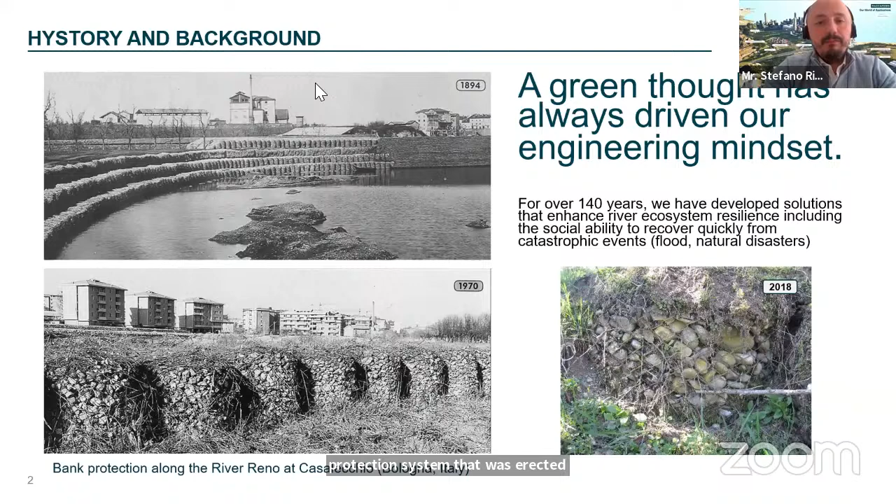What was done was to enhance the river ecosystem resilience in order for it to be able to recover from a potential catastrophic event, such as a flooding event. And the pictures that you see show that nowadays the protection system erected 140 years ago with gabions in the city of Bologna in Italy is still there.

Also, another evolution of the gabion itself was the mattress, the Reno mattress. You can use this for erosion protection of river banks, for example. Another evolution of this solution is the so-called Reno Mattress Plus for underwater installation, where basically you already have water in the river or port area, but you can actually pre-fill the mattress in a dry condition, lift it as you can see in the picture, and install it underwater. So this is another evolution of this idea from 140 years ago.

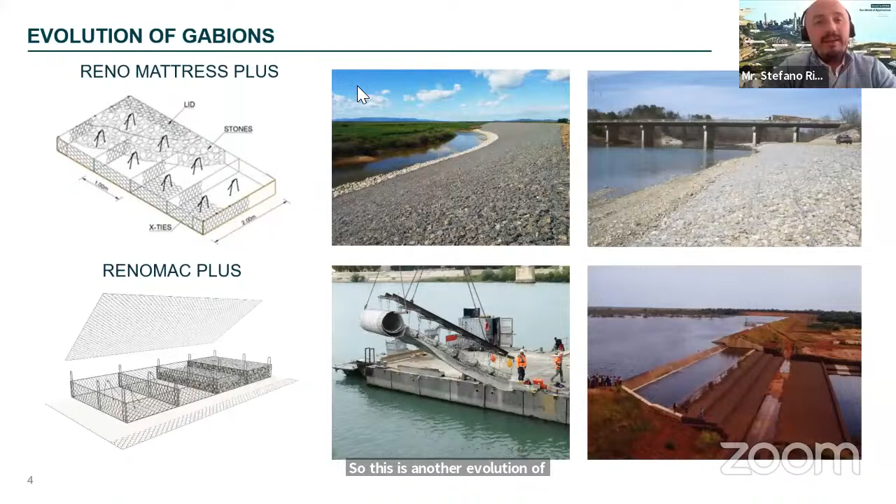But let's talk now about river work principles. Here we need to understand, and we need to ask ourselves as civil engineers, as hydraulic engineers, where am I in the design phase? Am I in a planning phase, a remediation phase, or do we have an emergency and need to find a quick solution to solve it? For sure, the best case scenario is to be in the planning phase, where you can actually plan the protection of the river or channel and have a sound engineering solution that will last for many years.

You can also be in a remediation case where you have, for example, a landslide or erosion at the toe of an embankment. So we need to go back and rebuild the bank where it was before the event, but cover it with a better and more sound engineering application and solution.

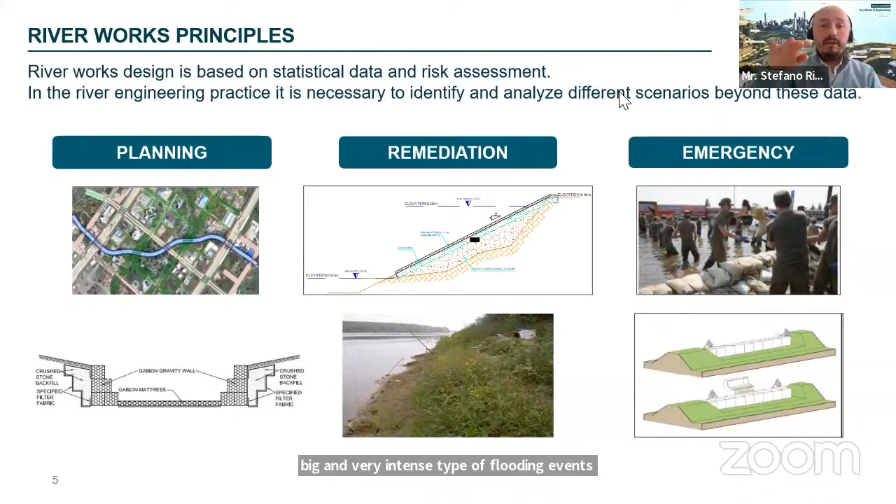You can also be in an emergency situation where you need to erect the bank of the river, for example if you are expecting big and very intense flooding events, so you can use some emergency application.

But very important for the river work principle is to have an idea of the characteristics of the watercourse, because we can divide the river into three main areas. It starts from the mountain region where you normally have very steep gradients, so not a big amount of water, but very powerful water because of steep gradients, high velocity, and high shear stresses applied on the bank. So you can have severe erosion and coarse bed load.

If we are talking about the mid-slope region, you are actually in the middle between mountain and valley, where you have moderate gradients, but a higher amount of water because you are collecting more water from the mountain region, and you can have some meandering in this type of area.

At the end, the third area is the valley region, where you have very low gradients but a big amount of water, so you need to confine and divert it, and you need to insert bank protection.

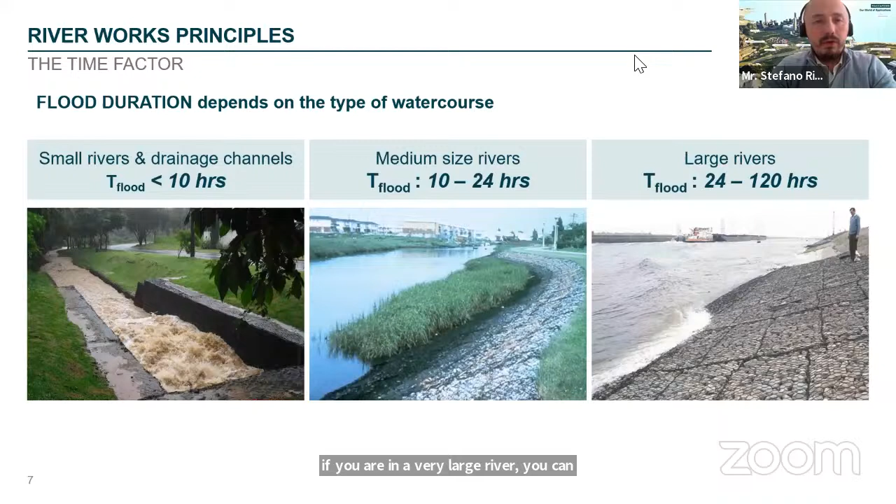If you are in a medium-sized river, it's between 10 and 24 hours. If you are in a very large river, you can go up to 120 hours — a very long duration. Depending on that, the time factor is very important in order to understand what resistance your solution needs to have in order to be safe from an engineering point of view.

But not only the time factor — also where we are and what function and application we need. For example, here you see different types of pictures: longitudinal protection of the river, a transversal gabion weir, a bank protection, and also a groin, depending on where we are along the riverbank.

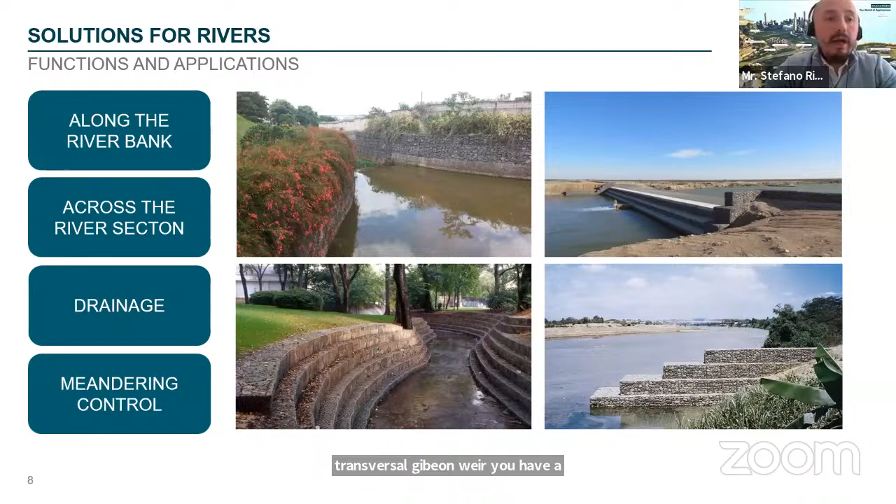So if we are along the riverbank, we need to understand which type of armoring system to use — a soft armoring system or a hard armoring system — but also we may need to go vertical with an earth retaining structure, depending on the failure that occurred and what the original bank profile was that we need to go back to.

What is very important, in my opinion, is also always to share experience, knowledge, and lessons learned in other parts of the world too. Imagine that this was a flood restoration project in France.

Back in October 2020, there was a big storm called Alex that caused significant damage in different parts of the country. The equivalent of a year's precipitation, one year of precipitation, fell in 24 hours. So nowadays we are facing this type of event with more and more frequency, where the same amount of water that normally falls over an entire year now comes down in just one day.

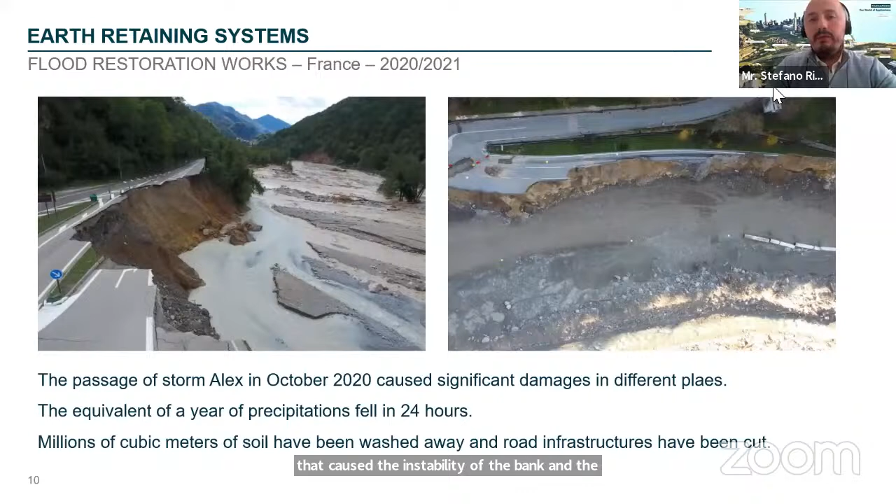This is a critical situation, and these are the results that our environment cannot take, because the design that was done, for example, for this river protection, was not considering that amount of water in such a short time. So what we had was a very big, huge erosion issue that caused the instability of the bank and the instability, as you can see, of the entire road in this case.

So what was done was a bank consolidation reinforced with, for example, reinforced soil structures up to 12 meters high, as you can see in the images, in order to have a hard retaining system using the Terramesh system or the green Terramesh, promoting vegetation growth, because at the end of the day, what gives you long-term protection is the presence of vegetation. This is why we always promote the use of green solutions, to decrease the carbon footprint of the overall structure but also increase carbon sequestration in the environment.

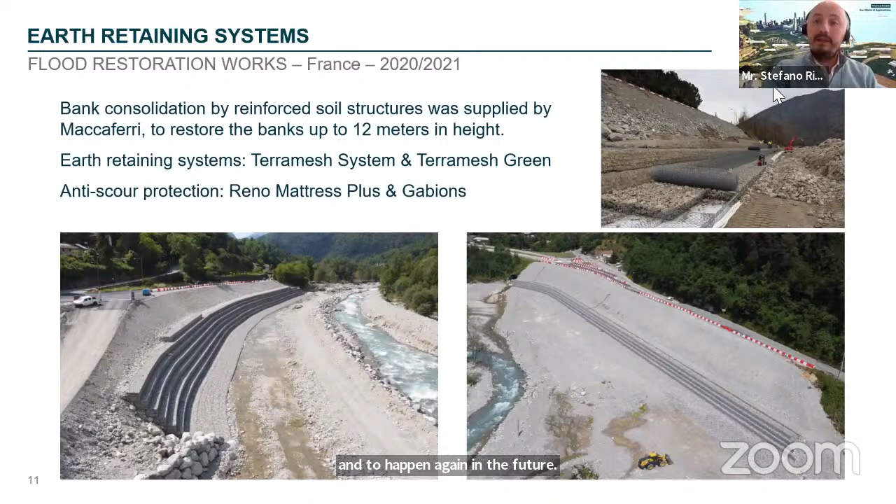We also added anti-scour protection at the bottom of the structure, because we want to prevent such an event from happening again in the future. So we added the Reno Mattress Plus and the Gabion structure.

Today, for sure, we don't have enough time to talk about all the principles, but if you are interested, we are always available to give you additional information on this lesson learned.

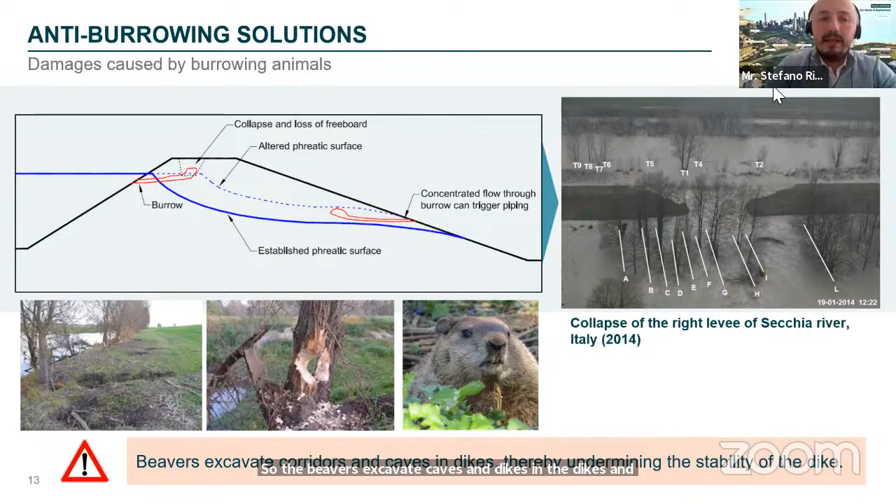Also, another possible solution to a big problem we are facing everywhere in the world: many structures and embankments are collapsing due to the presence of burrowing animals. Beavers excavate caves in dikes, undermining the stability of the dike. So basically what we need to do is prevent the burrowing animal from excavating a deep channel or a deep excavation inside the embankment, which causes a big problem of instability.

So we have different options to prevent this type of burrowing animal from excavating. We have a two-in-one solution, the anti-burrowing solution, but we also want to control erosion, so we promote vegetation establishment using the Renomesh Bio with a coconut fiber blanket attached to the double twist wire mesh, or the Renomesh Green.

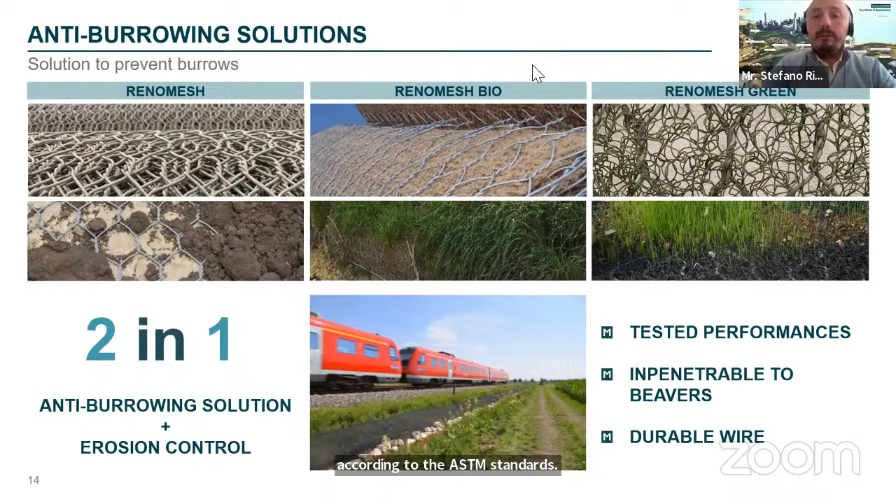Basically it's a three-dimensional turf reinforcement control mat, a high tensile turf reinforcement mat, or HTRM, as you're familiar with, tested according to ASTM standards, impenetrable to beavers, with a long durability of the wire up to 120 years.

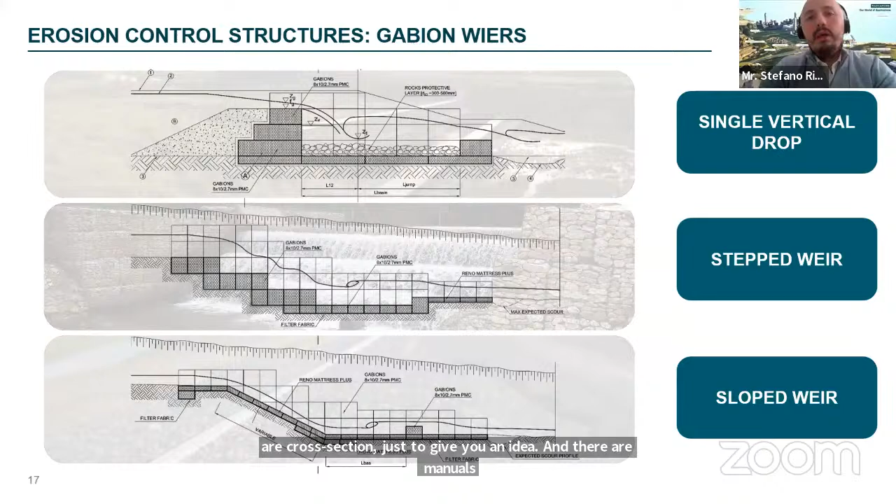Those are cross-sections, just to give you an idea, and there are manuals on how to design this type of solution. We always promote integration with nature.

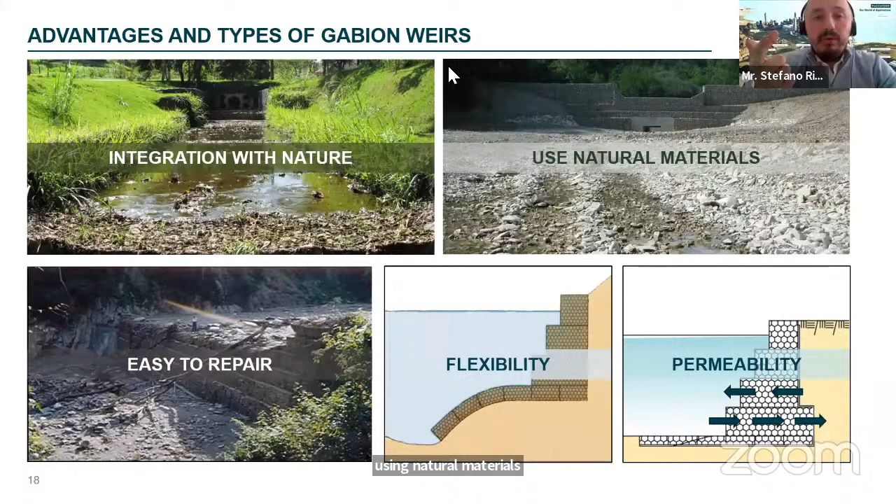This is very important because for us at Maccaferri, the green thought, as I told you at the beginning, is what drives us in our engineering mindset, because we want to integrate our solutions with nature using natural materials, but the solution has to be easy to repair, flexible, and permeable because of the presence of water.

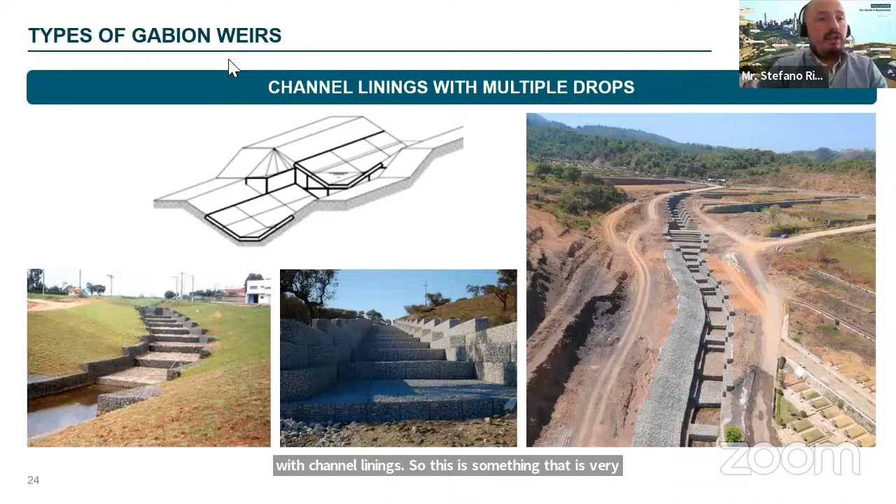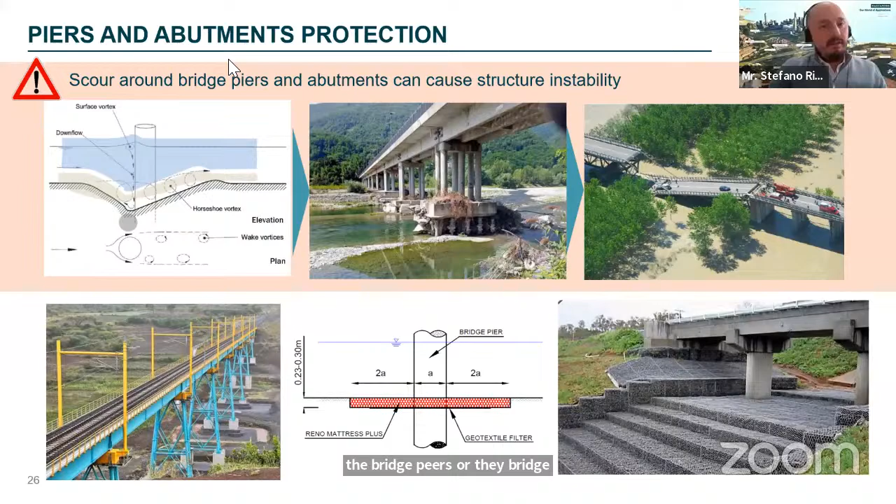Also, if we are across the river, the bridge abutments—this is very important and key to understand—many times we need to prevent the scouring effect that can cause structural instability of the entire bridge in the bridge piers. As you can see, many times the design was done without considering the potential long-term erosion effect. So what we need to do is protect the bridge piers or bridge abutments using a hard armoring system. The best way to show this is with a case history of hydraulic protection.

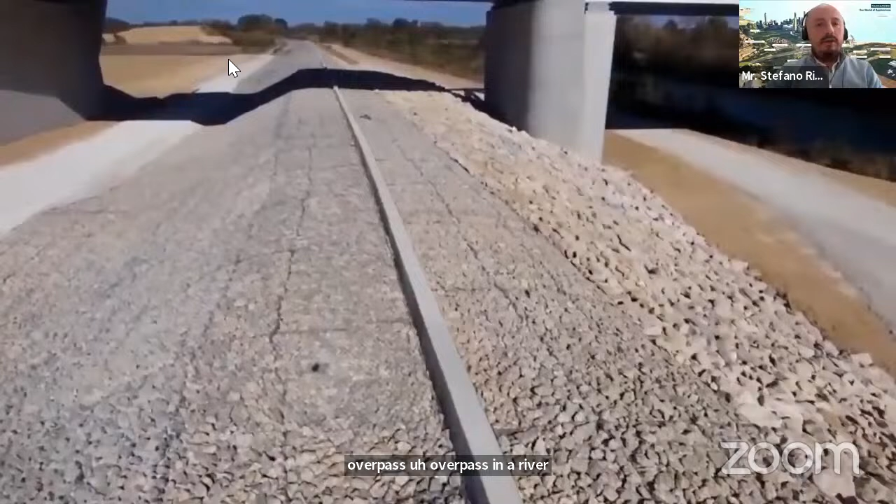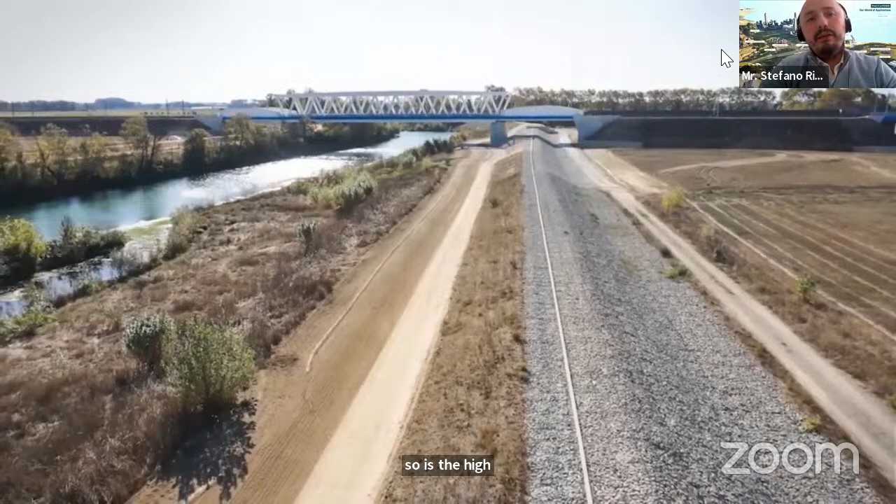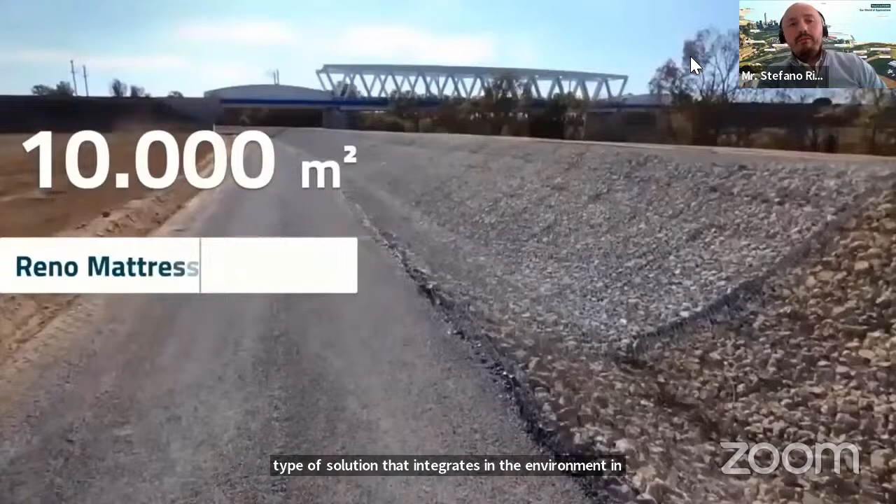Here we're talking about a railway overpass on a river—this is the TGV, the high-speed rail in France. As you can see, integrated with nature, the solution used was dyke protection using Reno Mattress and double twist wire mesh gabions. This type of solution integrates with the environment in order to protect not only the infrastructure, but also the entire community, preventing possible flooding.

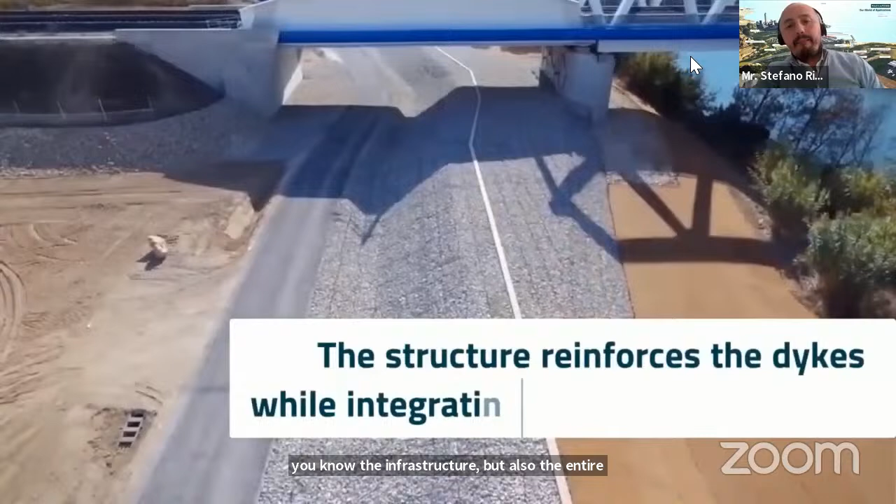As I was saying, this is again a real case scenario.

Let's move forward with drainage solutions for when we are getting closer to city centers or areas with highly impermeable surfaces. When we develop very impermeable surfaces, we get a bigger amount of water with higher velocity inside our drainage system. Our cities were designed many years ago, not considering the urbanization we are seeing nowadays. So the problem is that our infrastructure may not be designed considering the amount of water that now needs to be drained.

So maybe we need to go back and check, for example, for a small-size drainage channel, depending on the shear stress applied to the solution. Underwater, we can use Reno Mattress Plus, while on the embankment we can use MacMat, which is a high-performance turf reinforcement mat, the HPTRM, in order to have vegetation establishment, for example.

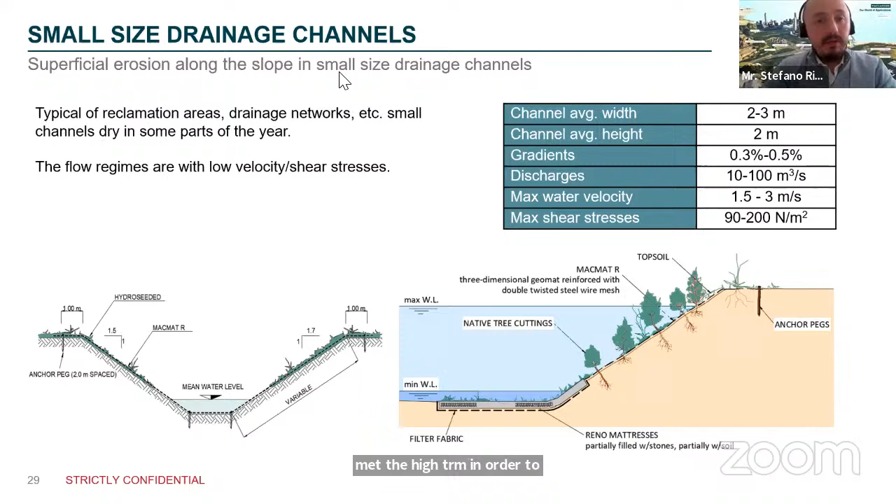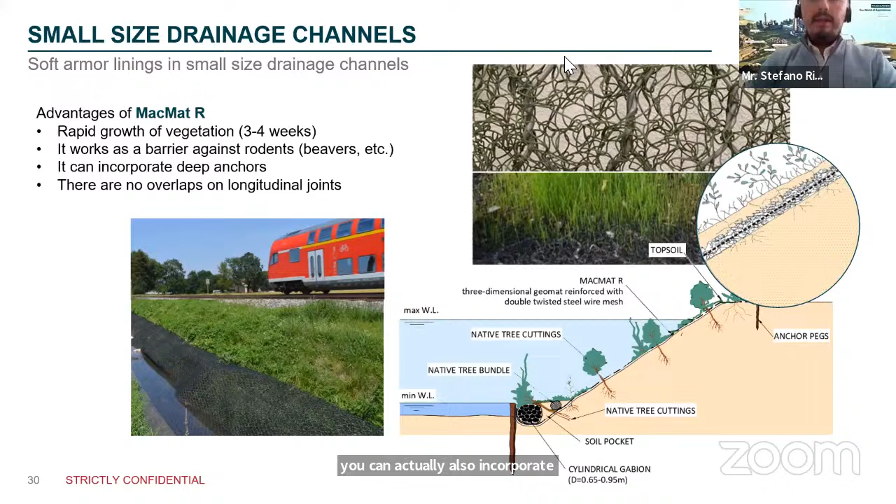What are the advantages of this solution? You have rapid vegetation growth—in 3 to 4 weeks you have vegetation establishment. It works as a barrier against rodents, as we saw before. You can also incorporate percussion-driven anchors, for example, and you don't have any overlaps between the joints.

Also, for a medium-sized drainage channel, you can use Reno Mattress Plus, and Dr. Ratnakar will show you later. Also, meandering control can be done using MacMat solutions where you need flexibility.

So what are the pillars of this type of hydraulic solution application? Flexibility and structural continuity. There is a big difference between rigid structures, such as concrete, or structures that cannot accommodate differential settlements, while with a flexible solution you can accommodate this kind of situation, considering that the presence of water is very common.

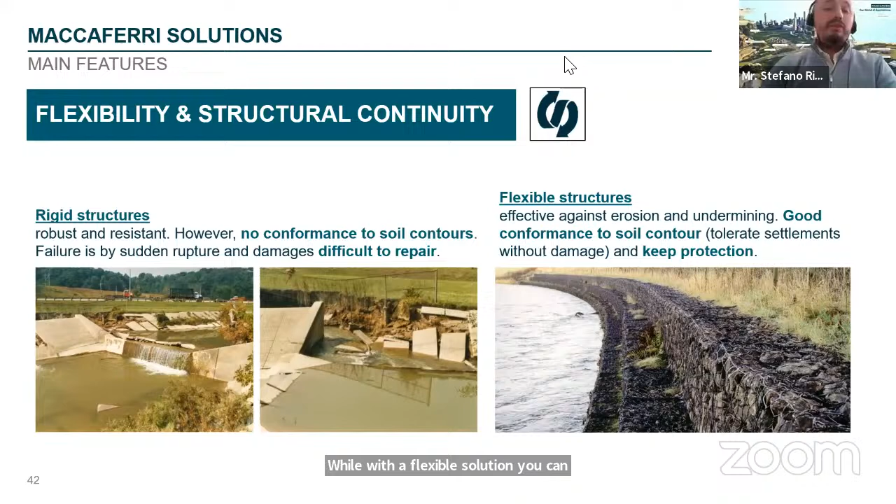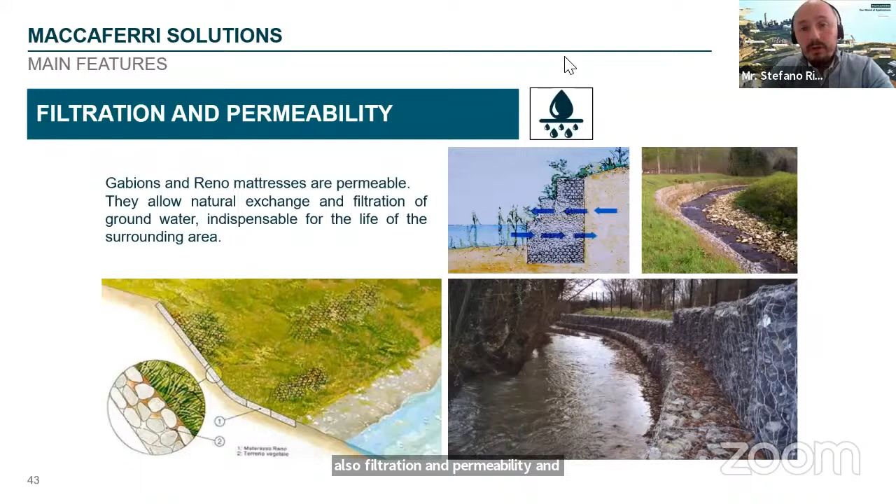Also, filtration and permeability, and vegetation establishment, which is very important from an erosion control point of view. But the most important, in my opinion, is environmental friendliness, because over the years the vegetation establishment creates a favorable environment during the recovery stage for this type of solution.

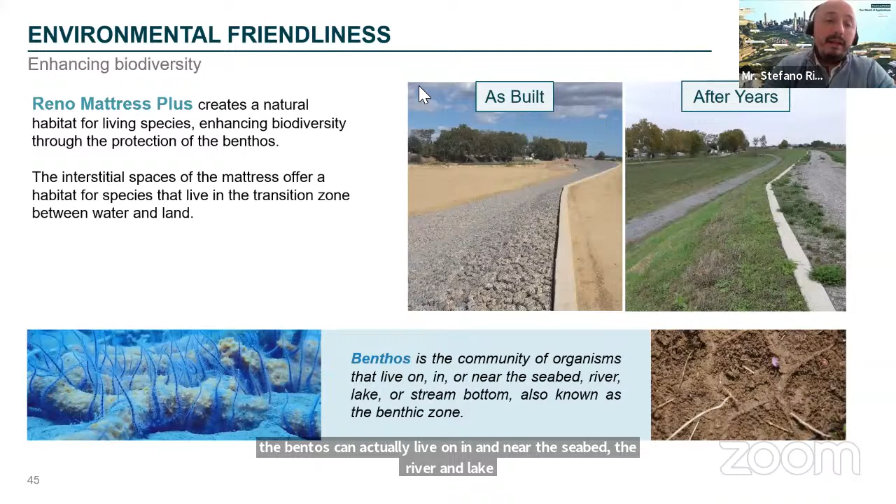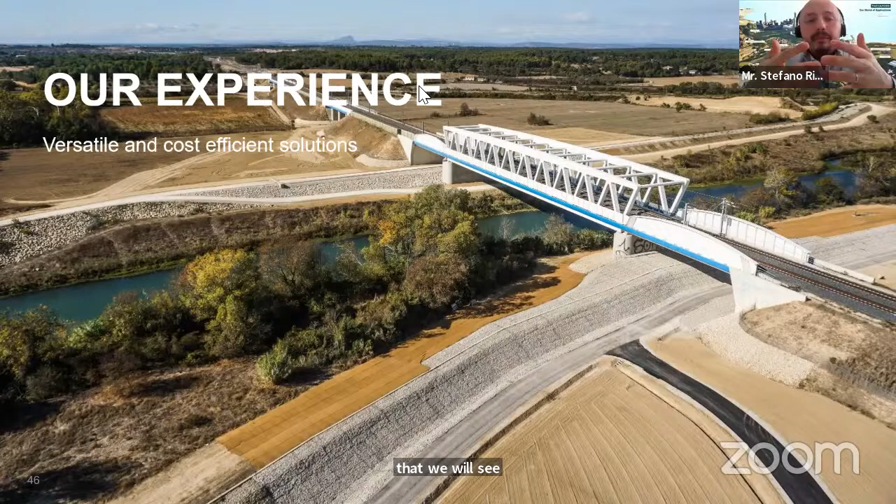Also, environmental friendliness—we are enhancing biodiversity because benthos can actually live on, in, and near the seabed, river, and lake. As you can see, we have plenty of examples, including one we will see later, showing the integration of our solution with the environment.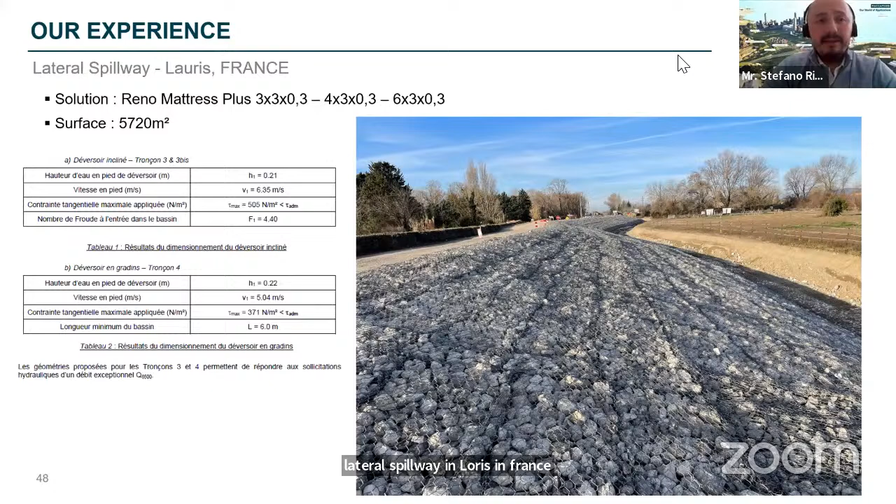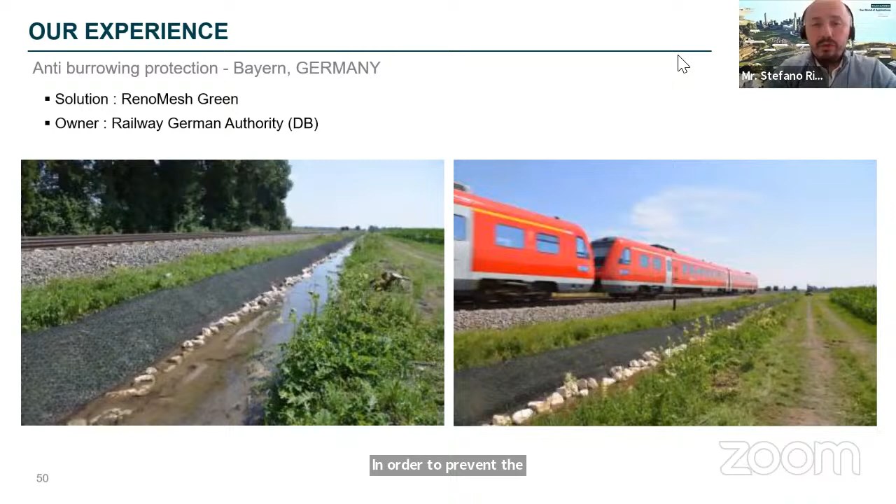Also another project in Romania to protect the culvert exit, which is very important. Also along a railway in Germany, to prevent beavers from excavating, as we saw from an erosion point of view, and also bridge pier protection—again, this is a very special application of underwater solutions.

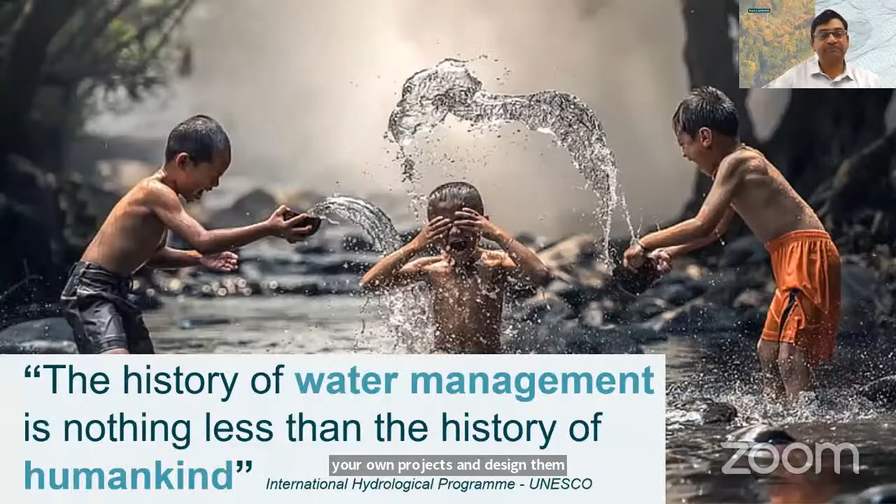To start with, if you see history, you will find all the major civilizations started with the presence of water, where there was a river course or major water source—all civilizations were around it, like the Indus Valley. The oldest civilizations you will find wherever there was water, because water is a very essential need for humankind, and that's why watercourse management becomes so important.

This is one of the biggest challenges in the 21st century. When I say watercourse management, it's not just about drinking water or irrigation water, but associated hazards also. Just now, Stefano presented a case from France where floods occurred because rainfall that's supposed to be received in a year was received in a very short span of time. I think this is very common all across the globe, and you must be seeing this in the news—India is not an exception.

We have flooding every year in the north part of the country. We have floods in the south—Kerala is well known now because of a few major disasters. Uttarakhand is not an exception; you have seen Uttarakhand for many years and how the situation is. So this is also one of the highest global risks which has an impact.

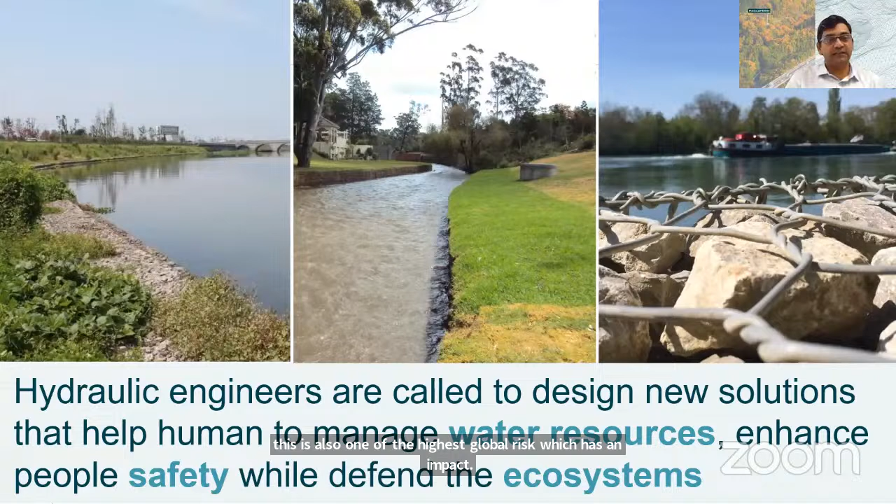Of course, when we look at ourselves as hydraulic engineers, we are being asked to design solutions that not only take care of the engineering problem, but also the safety of people and, most importantly now, the ecosystem. We need to look not just at today's problem to be solved, but take care that future generations shall not be negatively affected—if they have to be affected, it should be in a positive way.

In working in this direction, Maccaferri is committed to providing long-lasting solutions, and this comes through dedicated effort through innovation. The company started its journey, as Stefano mentioned, around 140 years back. From then, constant investment has been there. The important investment is in our innovation center in Italy, which we call the Maccaferri Innovation Center, which constantly works on innovative, sustainable, advanced products and solutions.

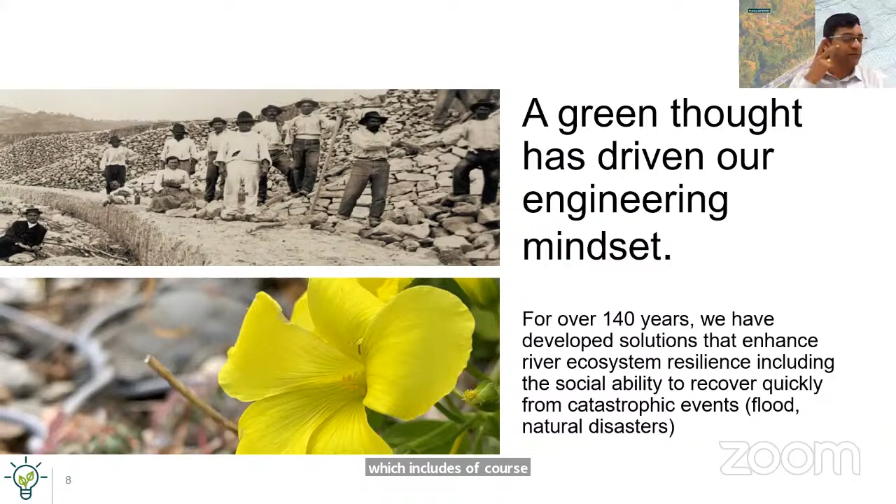Over 140 years, solutions have been developed for river ecosystems, which includes the ability to recover quickly from catastrophic events, usually floods or natural disasters. We had coined our campaign in the past called 'Design the Change.' Those who have been connected with us must be knowing about this campaign. For hydraulic engineering, we are looking at this campaign for providing long-lasting economical solutions.

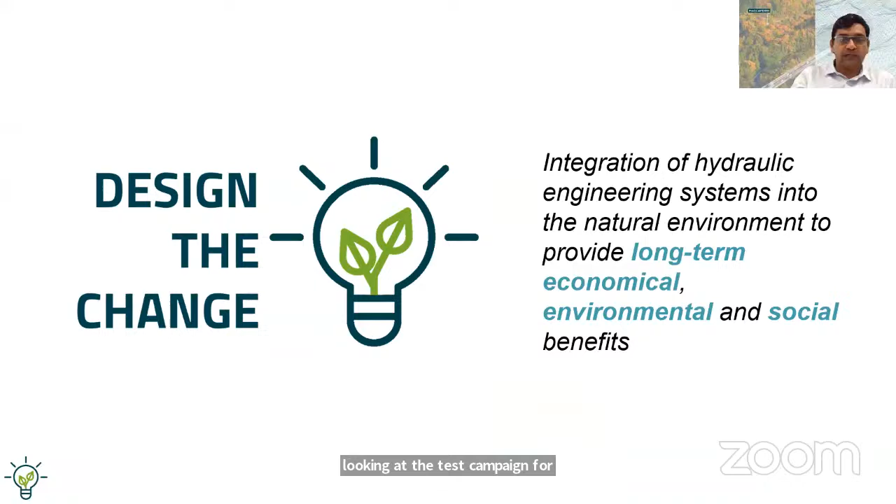Some historical landmarks on the development of the Reno mattress: the first ancestor of the modern Reno mattress developed by Maccaferri was the so-called Materasso Galleggiante, mentioned in historical books dated in the early 1910s, over 110 years ago. It was years later, in the early 60s, when Maccaferri developed the Reno mattress as an industrially manufactured product since its first applications.

Of course, mattresses are an interesting and flexible, monolithic structure. However, it was only in 1984 that mattresses became an engineered system, moving from a manufactured industrial product to an engineered system. Why do we say 'becoming'? Because it was experimentally tested at Colorado State University.

The standard mattresses at that time had a single diaphragm, which makes a partition, and it is connected to the base panel using spiral wire.

A few years later, in 1990, Maccaferri decided to industrially improve the manufacture of mattresses by pleating the base mesh panel to form a vertical partition, resulting in a double wall.

For two decades, the new mattress, so-called Castoro, was still designed using the allowable resistance factor from the standard single diaphragm tested in 1984. This was on the safer side, because the product with a double diaphragm has better resistance compared to the single diaphragm, but the single diaphragm performance data was still being used.

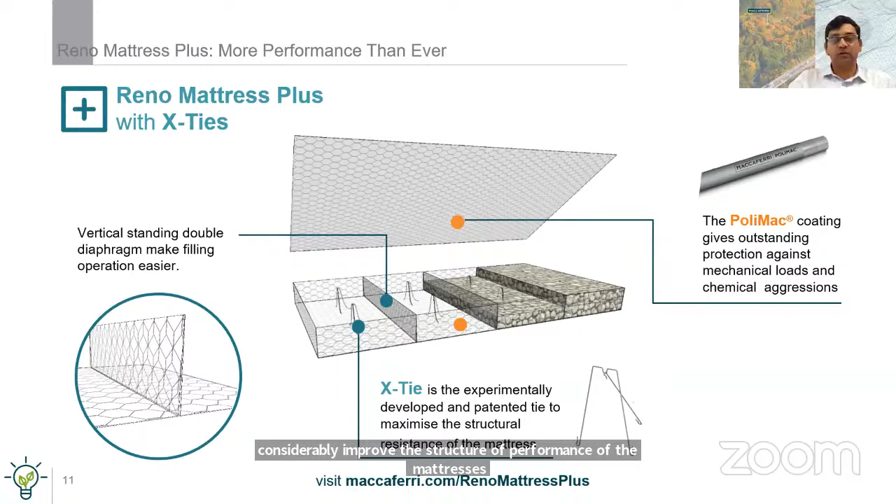The ultimate goal of this research was to introduce improvements in a new mattress system that could reduce the total cost of ownership in riverbank protection. The study was done in collaboration with MIC, the Maccaferri Innovation Center, and the Engineering Research Center at Colorado State University, one of the leading institutions for testing erosion control systems.

The objective of this study posed several challenges: the need to review the position of mattresses in hydraulic applications, the need to provide a common approach to stability in line with the state-of-the-art ASTM, the need to develop new ideas to improve performance, the need to provide numerical evidence of the different performance between double and single diaphragm partitions in a mattress, and ultimately, with reduced cost of ownership, the need to further raise the environmental value of the solution.

The research was developed in four steps. Step 1 aimed to analyze the effect of flow on the wire mesh and the type of partitions only. For this purpose, the test was performed running flow on empty mattresses. The scope was to see how much resistance the wire mesh alone would provide.

Steps 2 and 3 were made filling the mattresses with rock of different grading and uniformity. The combined presence of different partitions and stones allowed testing of the velocity dissipation through the mattress layer. Step 4 was made in a larger flume, simulating real flow regimes in an open channel.

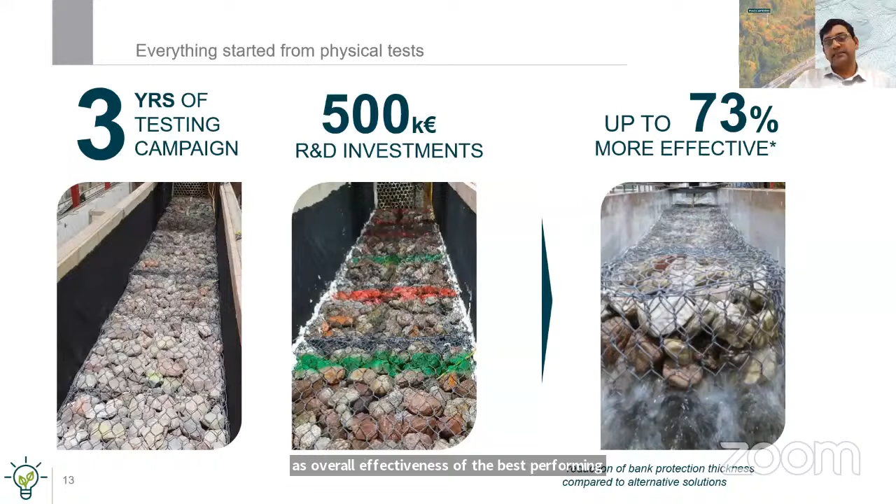The development of these phases required a thorough analysis of various aspects. All research was completed in almost 3 years, requiring important financial investment, as well as time and resources. On the other hand, the results brought to light a valuable outcome: the overall effectiveness of the best performing mattress resulted in a 73% reduction in the thickness of a bank protection compared to conventional riprap.

Of course, in summary, comparing the past and present design approach, we can say in 1984 with the first experiment study at CSU, followed by design criteria for stability of Reno mattress, with single diaphragm, in line with current design method used for riprap. When I say riprap, in India we refer to it as pitching or loose rock. The comparison based on the tractive force theory allowed us to define the equivalent design coefficient.

That's the Shields parameter, which is very important for designing these hydraulic structures to apply to mattress protection. This method, still in use today for riprap or pitching, is focused on the mechanical stability of the lining.

Condition of no movement of stone without consideration of potential erosive effects. The development throughout the years of new products, along with decades of successful projects and experiences with mattresses, and lastly creation of a new standard, ASTM D6460, introduced a new way to look at the stability of erosion protection systems - the mechanical stability combined with controlled erosion underneath the mattress.

This chart shows the summary of the past and present results, where we can observe the relevant improvements in mattress performance when we combine mechanical stability with an anti-erosion function. The light blue bars show the results for single diaphragm mattress based on the tractive force tested in 1984.

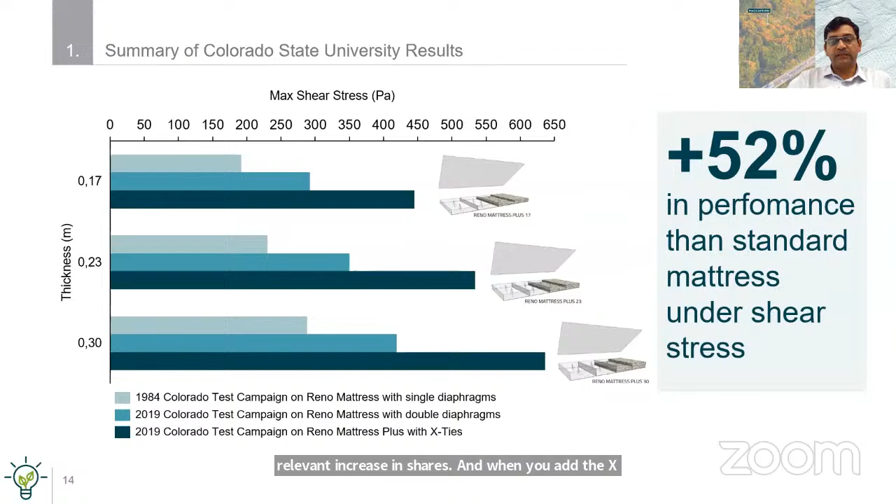Of course, all this information on Reno Mattress Plus, the CSU tests of the old ones and the new ones, we have updated in our software, that is MacRA software, which is available on our e-design platform.

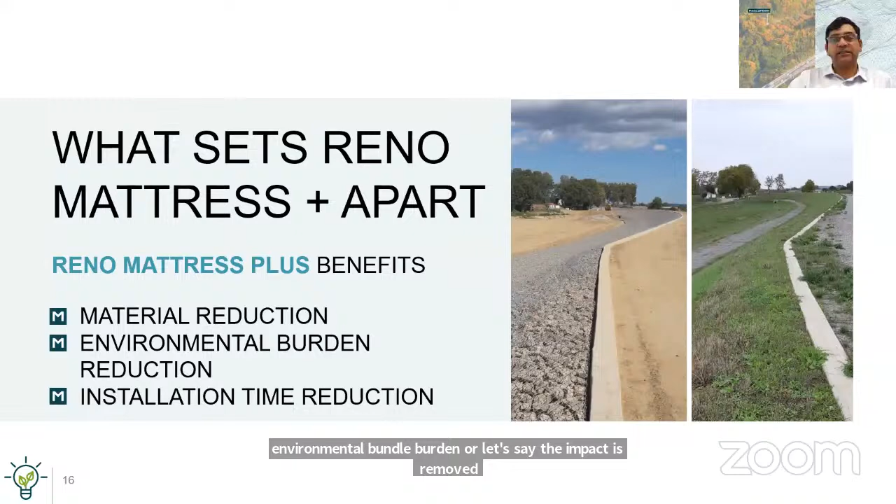When we look at this Reno Mattress Plus, it provides the benefits of material thickness reduction. As we reduce the quantity of materials, the environmental burden, or the impact, is removed or reduced. Installation time is also reduced. Most important is the total cost of ownership.

So we are looking at the solution, not just the material part, but its overall total cost to the owner, which is looked at from the perspective of less material, quicker installation, and most important, as India, we want to achieve net zero as early as possible. Finally, a greener result.

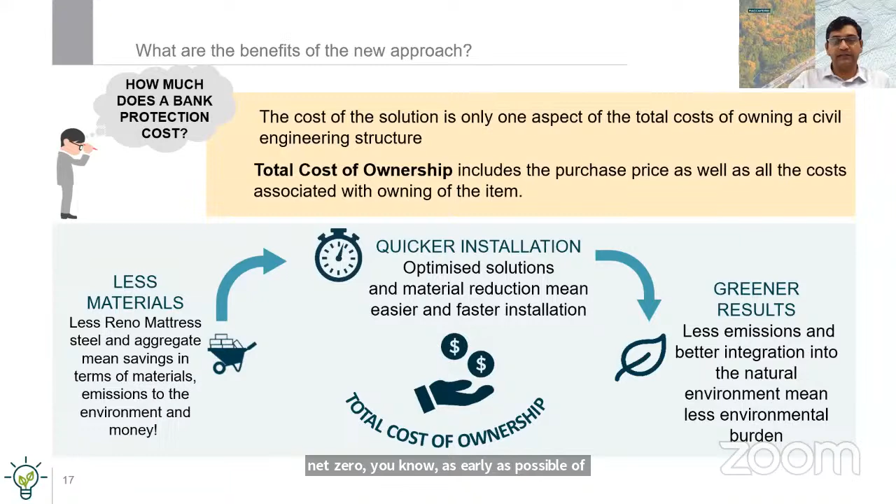So just to give a feel of this, if you consider a traditional riverbank protection using loose boulders, riprap, or pitching - for this, you can use the Indian standard IRC 89 for the design.

Let's say you may require 1.5 meters of thickness of these stones. The thickness of stones is governed by the discharge and the velocity, and usually the Indian standard talks about a minimum 40 kg weight stone. This can be replaced with standard mattresses, which are designed using the performances arrived from the testing in 1984.

And now we can look at Reno Mattress Plus as a result of experimental test results, which you have seen in the previous slide. The performance of the permissible shear stress is quite high.

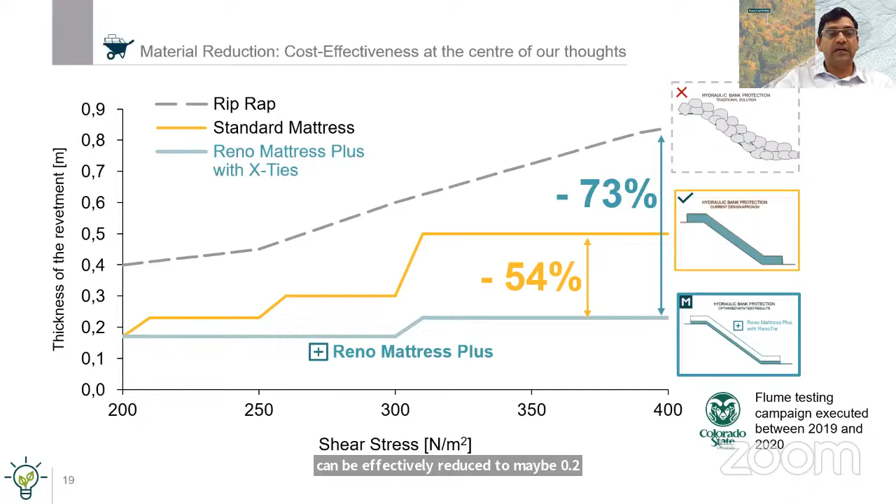Now, if we put this in a graphical form, let's look at a thickness of the revetment and compare it with the various shear stresses exerted by the moving water on the soil at the bed level. So you can see here, for a thickness of riprap around 0.8 meter, this can be effectively reduced to maybe 0.2 meter thick using Reno Mattress Plus, or maybe 0.4 to 0.5 meter thick of the standard mattress.

In applications with very high flows, that is discharge, Reno Mattress Plus is over 73% efficient compared to riprap or pitching.

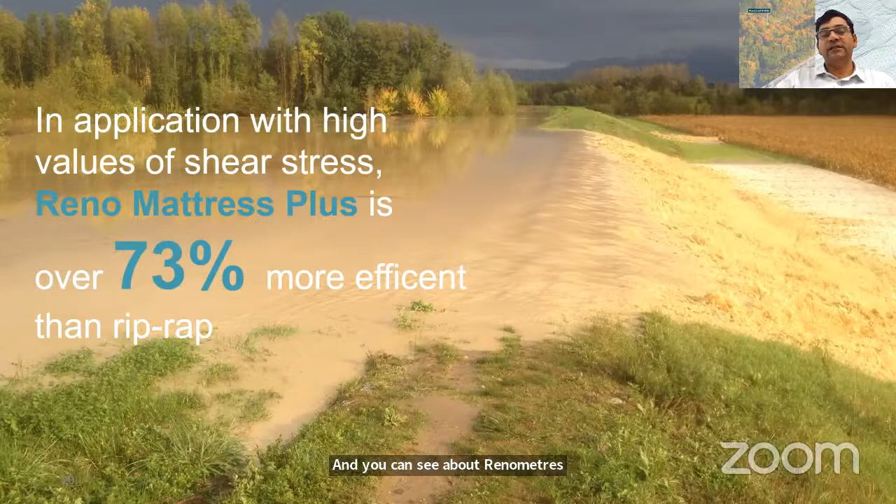This finally yields a carbon footprint saving - if we calculate the kilograms of CO2 equivalent per square meter of bank protection using riprap or pitching versus Reno Mattress Plus, you will find a reduction of around 82%. This 82% reduction in carbon emissions finally yields a green solution.

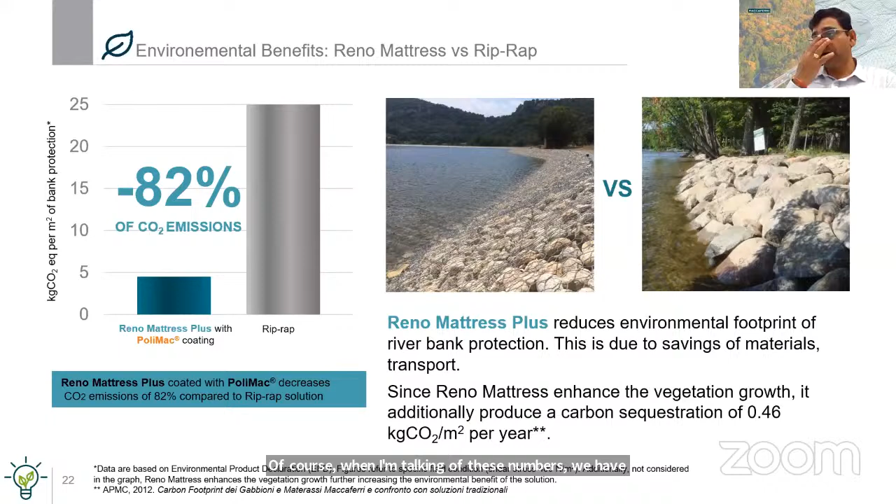When I'm talking of these numbers, we have taken them from our environmental product declaration - that's the data from where we get the information on the carbon footprint. There are certain assumptions, but these are based on the shear stress of 400 Newton per meter square.

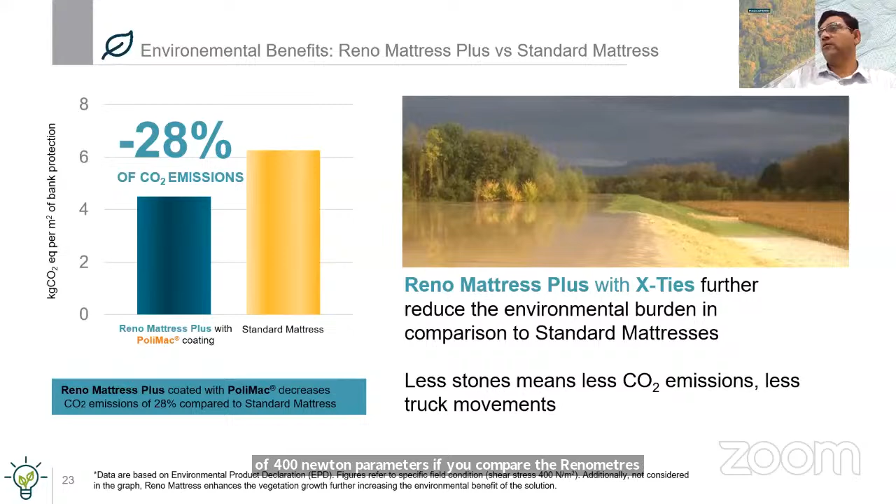If you compare the Reno Mattress Plus with the standard mattresses, you can see it's around 28% reduction in carbon emissions. Of course, when we look at these kinds of solutions, they are living structures.

So one of the advantages of this Reno Mattress Plus is not only in terms of performance against shear stresses, but also installation—the double pleated diaphragm and the X-tie make it relatively easier to install compared to conventional mattresses.

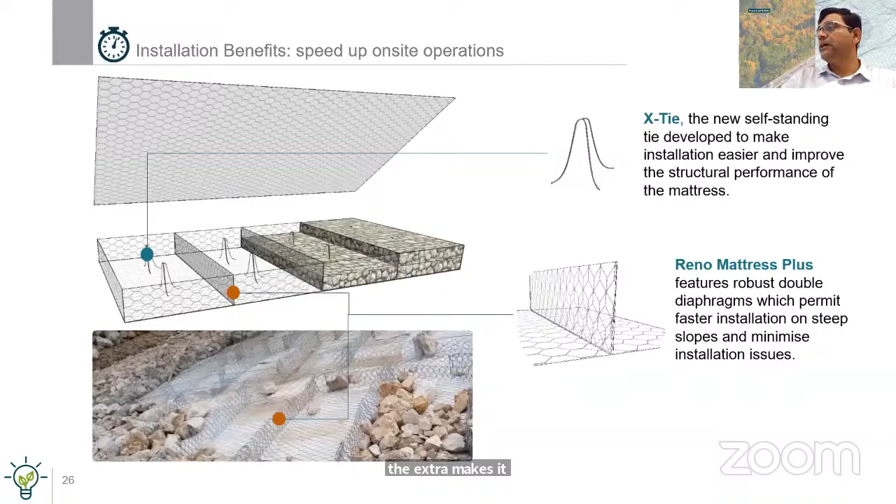And of course, the performance of those mattresses is further enhanced with the advanced polymer coating, PoliMac, which provides very high abrasion resistance.

When we say high abrasion resistance, if you look at current floods, you'll observe a lot of fine particles which cause abrasion on these mattresses. Hence, you need better polymeric protection, which can be achieved using PVC, but PoliMac provides even higher performance.

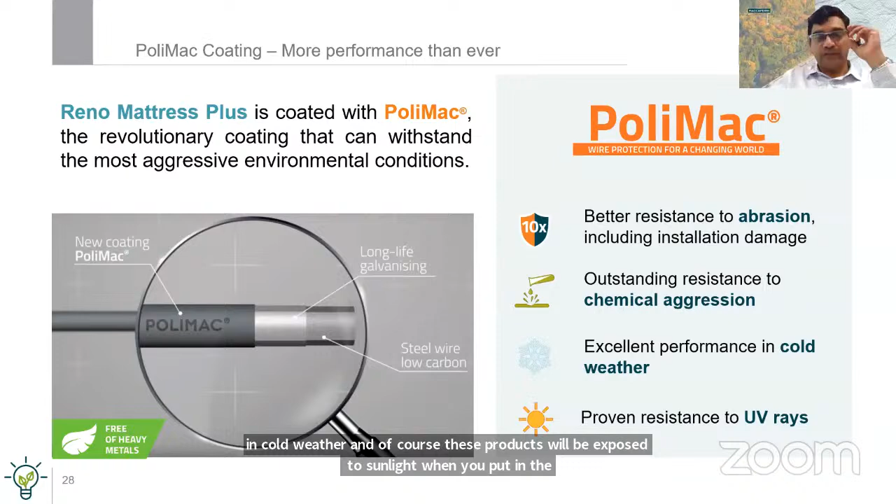These products need to survive changes in the environment, such as chemicals present in water, and if used in cold climates, that needs to be taken into account. PoliMac has very high performance in cold weather. These products are also exposed to sunlight when placed as river protection, or to UV light when there are no floods, and PoliMac provides better UV protection.

Not only is performance certification important, but environmental and digital certifications are too. In order to estimate the carbon impact or carbon footprint, you need environmental product declarations.

Now, moving on, I'll switch to the other presentation on design, where I'm going to talk about the software MacRA Design, MacRA River Analysis. As I said, this software is available on the eDesign platform. If you type eDesignMacRA.com and Google it, you'll land on a page that takes you to this software. In the next 10-15 minutes, I'll walk you through the basics of the software so you're able to use it.

MacRA River Analysis is a suite design software for hydraulic engineering—a new online software. To enter the geometry, the user needs to navigate through the window, define parameters, generate a plan view, and define one or more river reaches.

MacRA design runs analysis of watercourses, assuming uniform flow in a prismatic cross section and constant gradient. The software allows you to choose the type of protection on each segment of the cross section from a database of materials already loaded into the software.

Each material in the database has an associated shear stress resistance to flow, and this allows the designer to verify whether the given type of protection is sufficient for preventing erosion.

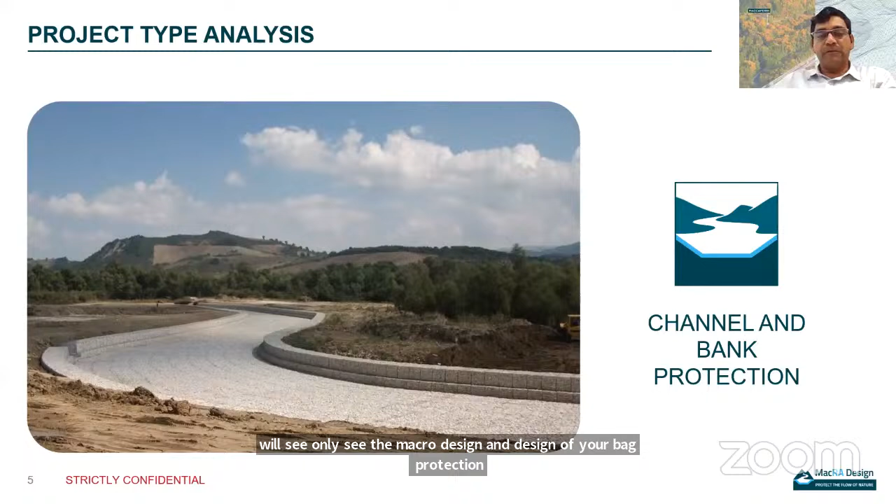For the scope of this session, we will only look at MacRA design and the design of riverbank protection for open channels. There are also options for drop structures, but due to time constraints I will not cover that in detail—I'll just briefly touch upon it.

When I talk about the prismatic cross section, this is typically what you may have—choosing from different predefined cross section templates. The user just needs to adjust or change the length and slope of each segment to match the dimensions at the site in MacRA design.

The geometry of the cross section is made up of 7 segments, each allowing 3 sub-stretches. Given the simple hydraulic design, the data to be entered are just discharge and gradient.

Although simple in its philosophy, the software has gained wide interest in engineering practice due to its ability to let you choose an erosion protection system for each segment of the cross section, assigning a shear stress and roughness value to each chosen system from the database, as mentioned.

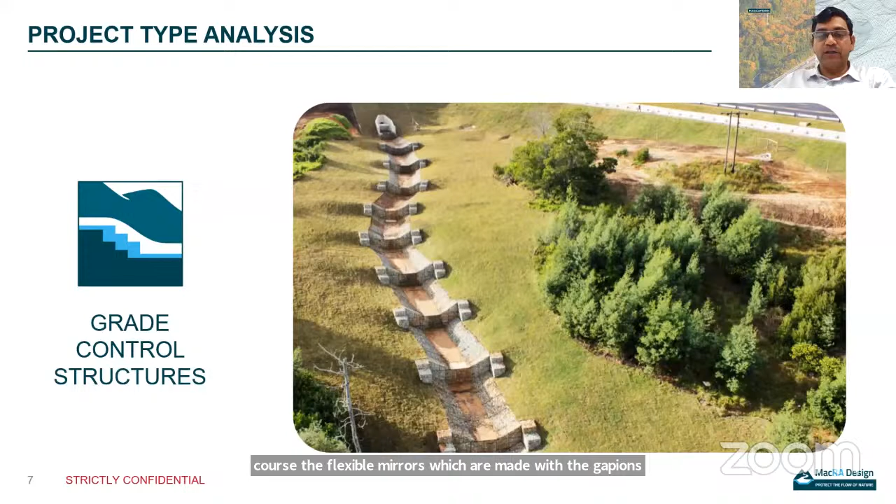The second part of the MacRA design software, which will be a subject of future discussions, will basically be grade control structures, so probably we will plan a separate webinar on that. Here, of course, the flexible weirs made with gabion mattresses are the structures ideally to be designed. But as I said, we will stick to only the first part.

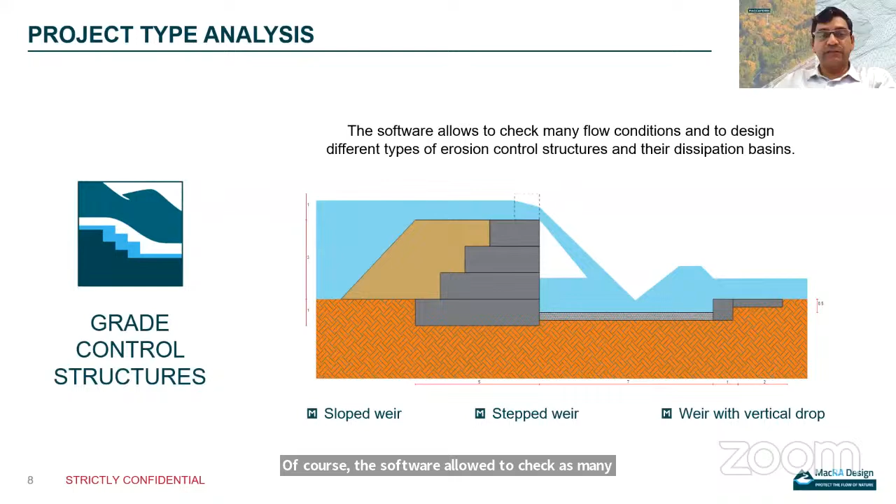Of course, this software allows you to check as many flow conditions and design different types of weirs: sloped, stepped, vertical drop. For each and any of these hydraulic schemes, MacRA design will provide a complete report, including sketch and cross section. The data entry and view of the calculations are through a user-friendly, intuitive graphics interface to assist the comprehension of the formula design methods.

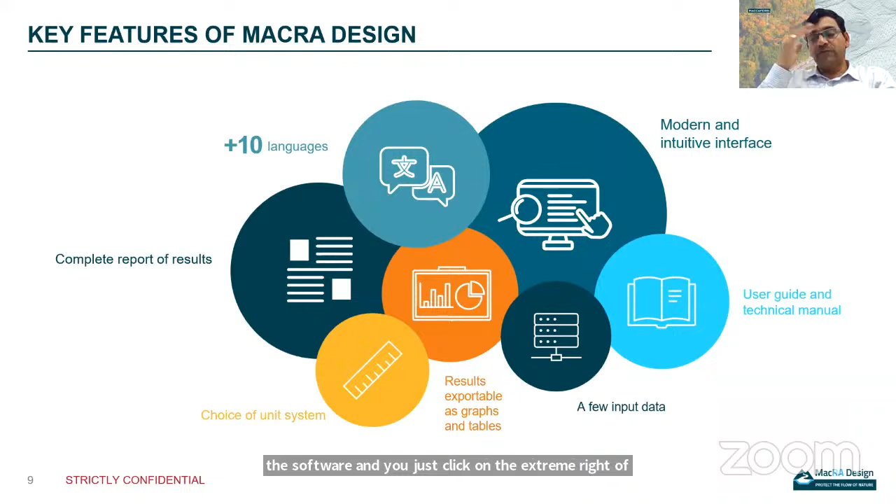A user guide and technical manuals are also included in the software, and you just click on the extreme right of the software and you will find the manual. Of course, after simple registration as a user, you will automatically have access to all the software features.

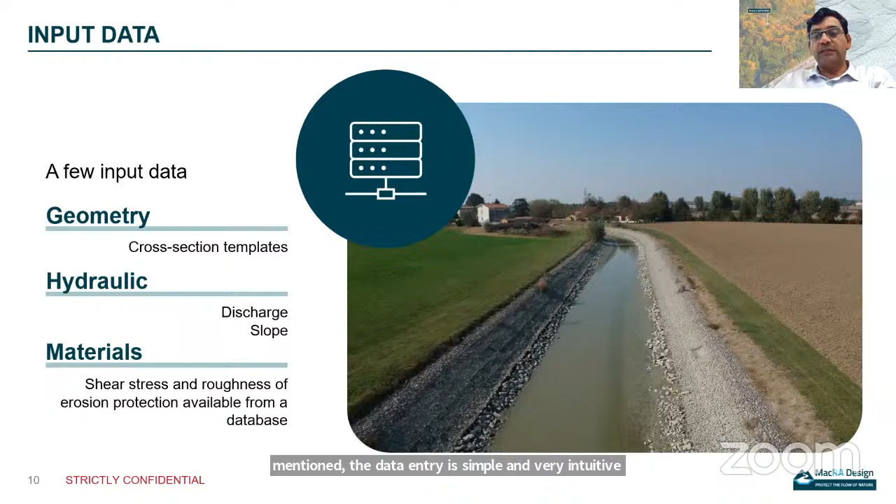As mentioned, the data entry is simple and very intuitive. The user shall enter the cross-section dimensions starting from a cross-section template, some basic information about hydraulic parameters such as discharge and average gradient for the cross-section, and ultimately, and most important, the type of material used in the river. The user will have the possibility to choose from a wide variety of materials.

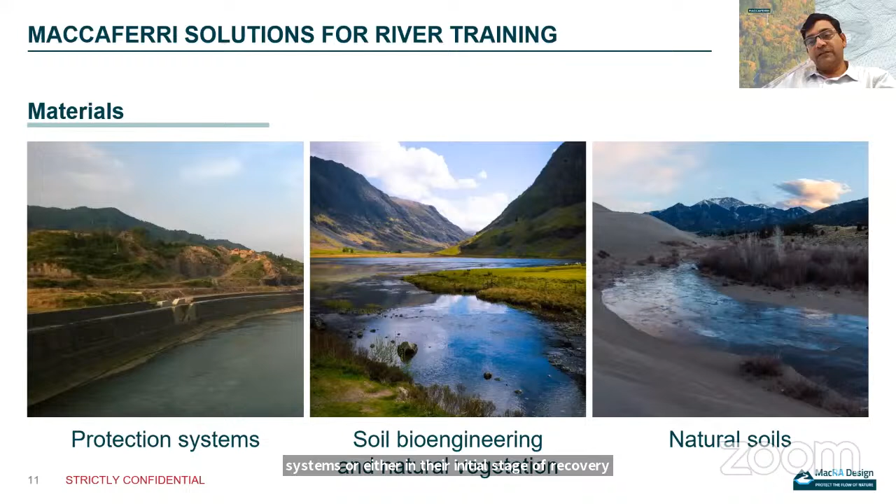Basically, the protection systems are for protecting natural soils or green systems, either in their initial stage of recovery, that is soil bioengineering techniques, or at their advanced vegetation stage of natural vegetation.

Longitudinal structures for riverbank stabilization can be grouped into two main application areas: linings like blankets or turf reinforced mats, meaning rolled erosion control products, or Reno Mattress, serving the function of surface erosion protection. The second category is earth retaining systems, which is completely different in terms of constructing retaining walls. But of course, here the design will be governed by the hydraulic design, which is different. In terms of geotechnical stability, that's a different part, but hydraulic design will be covered here.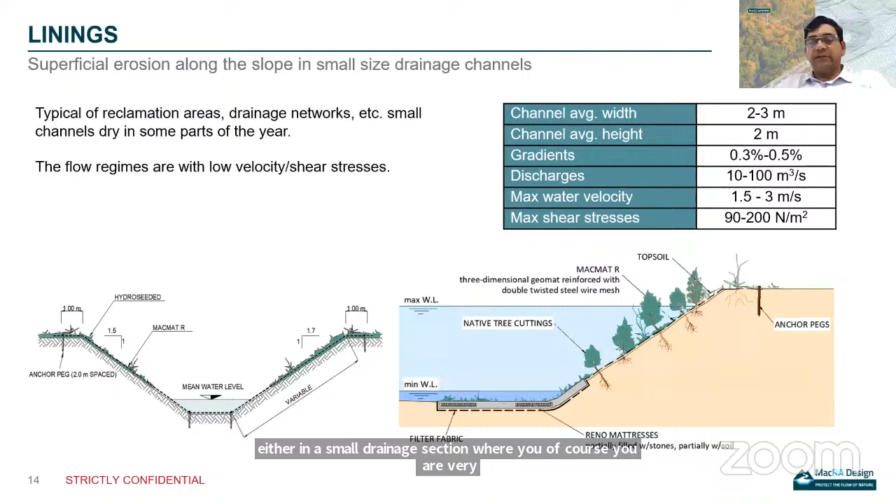Of course, typical examples of soft armor linings include small drainage sections where you have very small flow, or typical flow regimes where you use softer armor linings like mattresses, synthetic mats like MacMat, which basically promote vegetation growth. Of course, these mats can be reinforced with steel mesh or polymeric geogrids, providing excellent performance with these advantages.

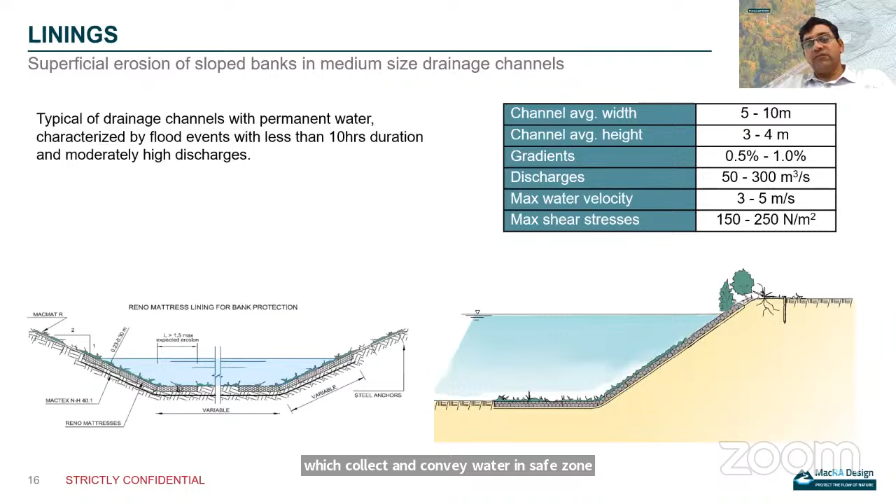Of course, the use of mattresses in river applications is very wide, from typical drainage channels like streams which collect and convey water safely, to protection measures ensuring the flow is safely brought to the delivery network. The second category, earth retaining structures, is used when there is combined instability.

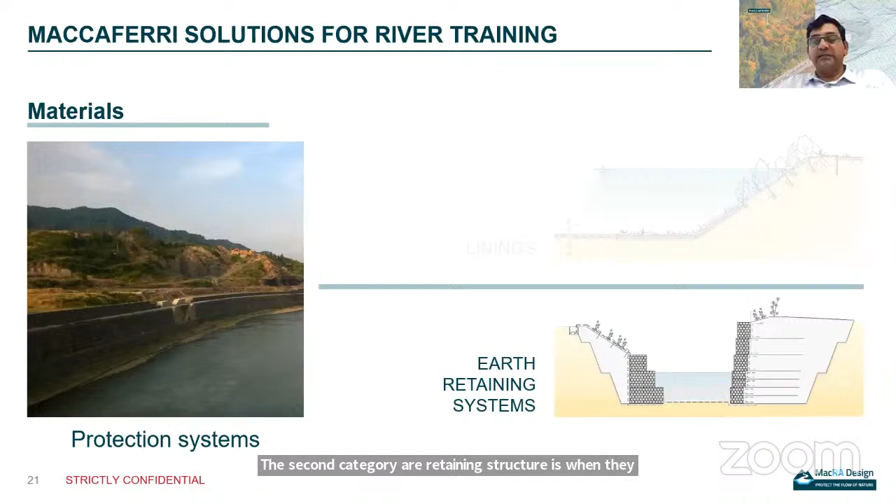The erosive forces of water flowing in the river generate geotechnical instability. In order to re-establish the geotechnical stability of the slope, we can use conventional gabions, terra mesh, or either system type which is rock-filled in front, like green systems. Of course, the improved performance of strong-face gabion with stronger and more robust steel wire mesh front exposed surface provides a better response in terms of horizontal pressures.

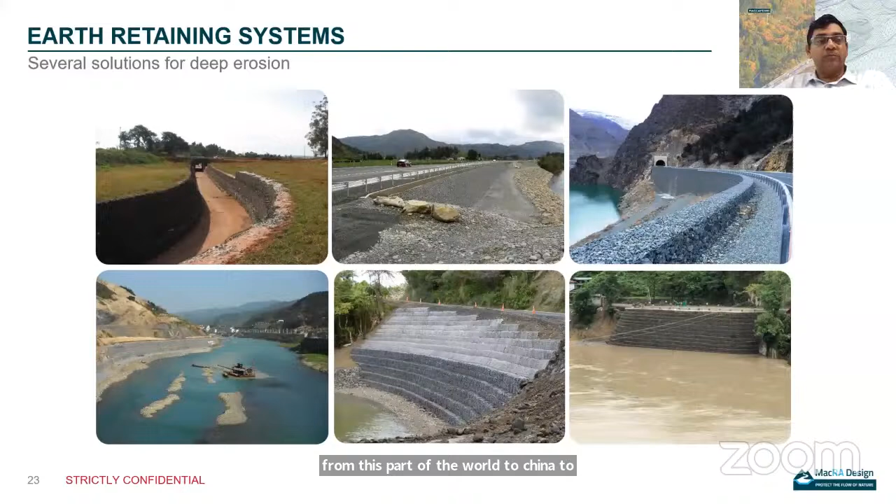Here we can see examples of applications with different gabion and terra mesh types in a variety of different locations, from this part of the world to China, to Myanmar, to Europe. So all these are from different parts of the world.

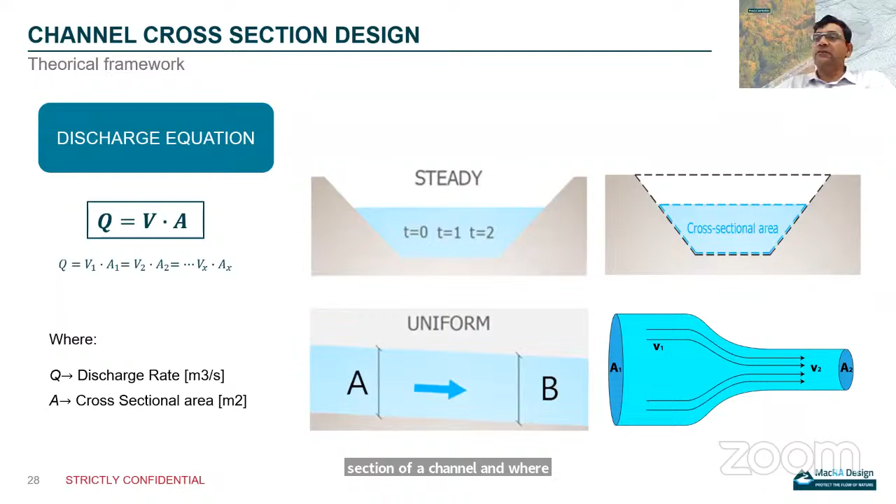Here, of course, we can look into the basics of how exactly the design is being considered. Let's look at the cross section of a channel, where the basic equation of discharge, dependent on the cross-sectional area and velocity, is being considered. When we look at velocity in open channels, we look at the wetted perimeter and cross-section area. From there, we can find the hydraulic radius R, which is cross-sectional area divided by wetted perimeter. S stands for the longitudinal slope or riverbed gradient.

Here we are looking at shear stress versus velocity. Most of the time, people always talk of velocity, but why are we referring to shear stress? Because erosion flows follow the principle that instability starts when the flow becomes critical, causing soil particles to get incipient motion. Critical velocities depend on the type of soil, water depth, and the channel section.

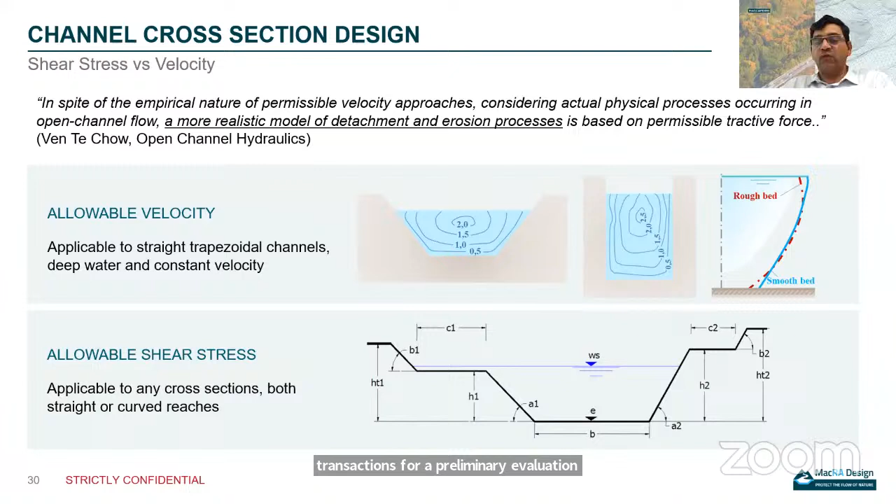So the critical shear stress on the riverbed surface at incipient motion will be equal to the allowable shear resistance of each soil. This criteria of checking allowable and limit velocity is suitable for regular prismatic channel sections for a preliminary evaluation, while checking shear stress is more representative of water effects in typical open channel sections where banks are subjected to erosion.

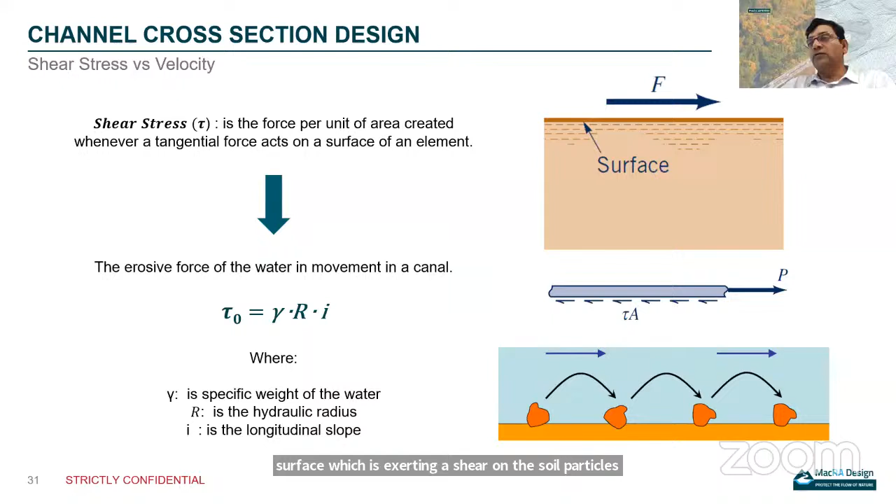When I talk of shear stress, we are looking at the water surface exerting a shear on the soil particles. It will be a function of the depth of the water flow, and also the hydraulic radius and the gradient of the slope.

The shear stress, or hydraulic load, acting on the surface at a given point of the river bed, tau b, shall not exceed the maximum allowable shear of the material in contact with water, which we call tau c.

For heavy lining materials, the allowable shear stress tau c, as well as for loose granular soil material, can be exceeded as a function of the constant parameter, that is the Shields factor, which can be obtained from tests. That's what we discussed previously.

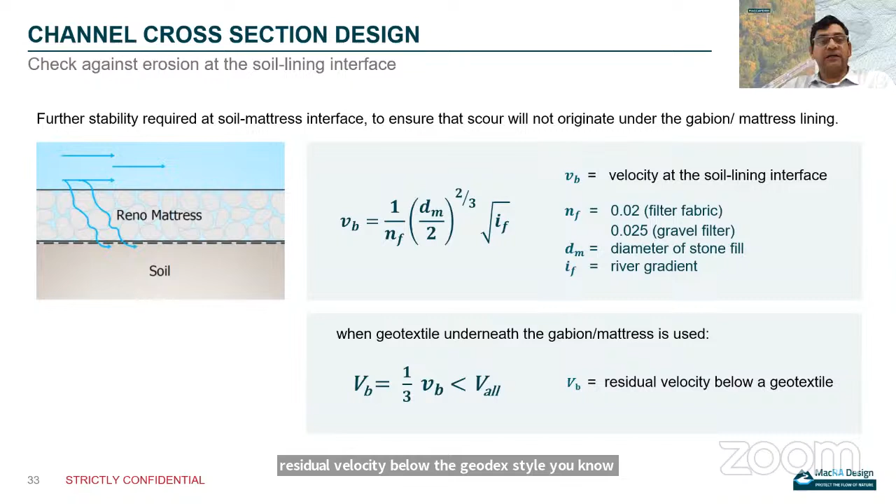For erosion blankets, such values of C are expressed as a function of time and duration. For other systems, it has to be obtained from experimental values. We also have to take care that the residual velocity below the geotextile shall not exceed the allowable velocity of the soil particle.

Grade control structures we will cover in some other session. As I said, the MacRA design, which we call 'protect the flow of nature', is available at edesign.maccaferri.com. Now I would like to quickly glance through some Indian case studies.

This is a case study from Assam. You may not see this as something like a hydraulic structure, but it is one. On the extreme left is the big river, and you can see nice greenery developed with living structures built using green terramesh, paralink, and a geotextile.

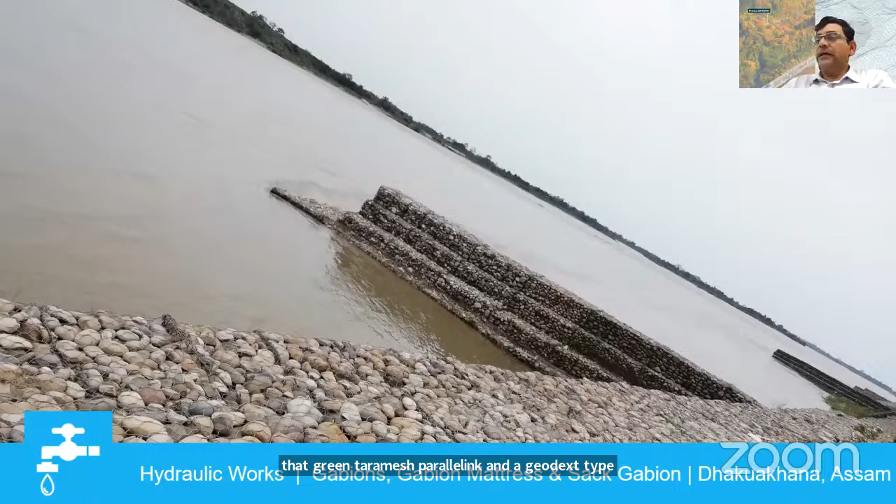Another example, again in Assam, here a very advanced solution in terms of groins made up of double twisted wire mesh products are being installed. The purpose here is for the training of the river.

Another example from the state of Bihar, this is Valmiki Nagar. Here the issue was the banks of the river were unstable, and there was a lot of erosion. Finally, a solution was adopted using a Reno mattress at the bottom, followed by a retaining structure made with the terramesh system, and the slope portion above the HFL was treated with MacMat for erosion control.

Another project from an India region - when I say India region, it's very close by, ours is like from the country Nepal. You can see very nice groins being constructed using double twist wire mesh products. Another example of river training works, which includes mattresses and gabions from Nepal.

One project in the capital, that's in Delhi - the Delhi Noida bridge, which connects Delhi and Noida. This bridge required protection, floor protection, and it was a very thick protection which was optimized more than 20 years back using double twist wire mesh products.

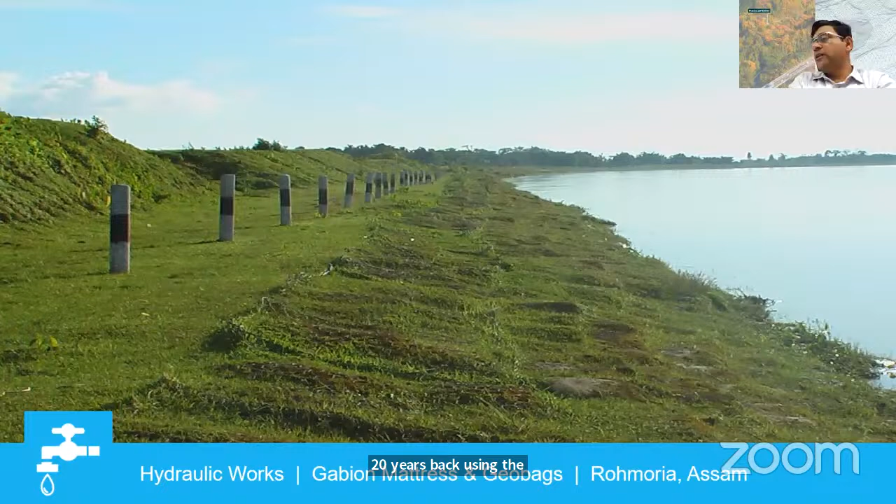Again going to the northeast, on the river at Rohmoria, where a mix of solutions including double twist wire mesh were used, and now you can see the protected bank is completely covered with greenery.

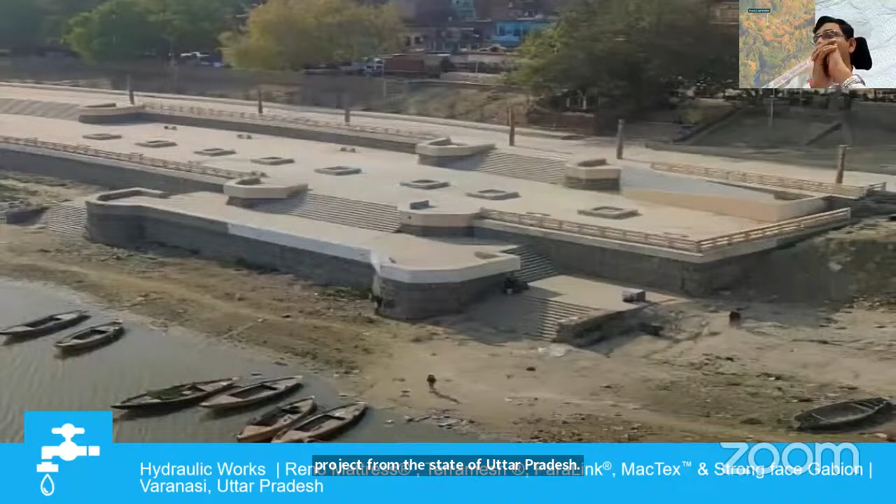This is a project from the state of Uttar Pradesh. The river bank, or let's say the ghat, was not so useful before the construction of the structure. What you see in the picture is basically the ghat which is being developed. For development of this ghat, strong face gabions and mattresses were used.

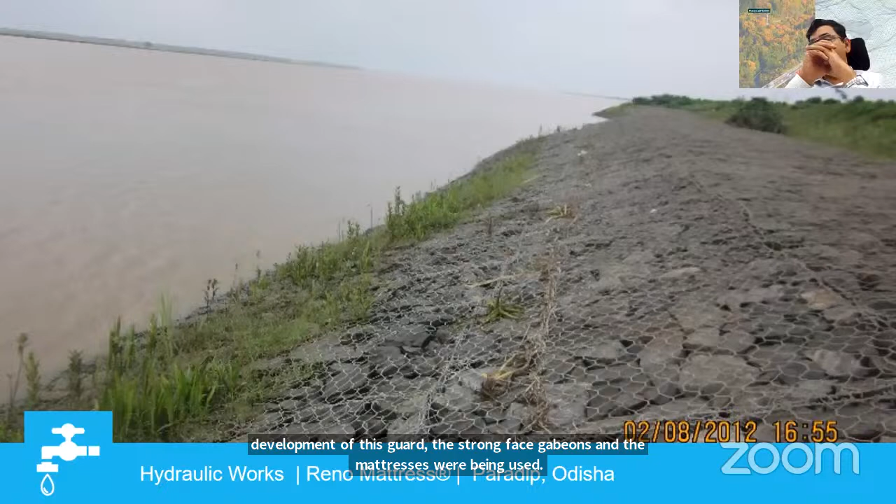This is a very old project, used basically for river bank protection. This is on the river Mahanadi, where it enters the sea. Just before that, at Paradip, Reno mattresses and gabions were installed underwater.

Another very old project from the state of Gujarat. This is a river bank protection on the river Sabarmati, and fortunately or unfortunately, immediately after construction of this structure, it received once in 50 years flood, and it survived.

So with this brief on the river bank protection works, the testings carried out on the mattresses, the Reno Mattress Plus, the PoliMac, and of course all this know-how is now available in a software, MacRA. With this, I would like to really thank the Institution of Engineers India for providing this platform. I think this is one of our last webinars of the series, but I'm really thankful to the organizers for giving an opportunity to share the know-how with a larger audience. Thank you.